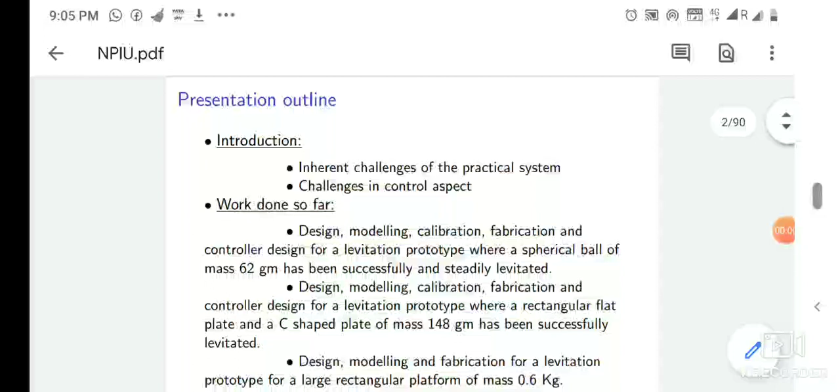Hi everyone, I think all are safe. Stay home. So in this current scenario, I thought I should discuss a topic which is very relevant nowadays.

So I am going to start my presentation on electromagnetic levitation.

Overcoming the effect of gravity has been a dream for generations of thinkers. Now you see that the maglev train has come, the magnetic levitation train. Japan and Germany first started this work. The common point in all these applications is lack of contact, and thus no wear and friction - frictionless. So obviously we need more speed to decrease the time from one platform to another. This increases efficiency, reduces maintenance costs, and increases the useful life of the system.

The recent advances, notably in power electronics and magnetic materials, have focused attention within the last decade on the application of electromagnetic suspension and levitation techniques to advanced ground transportation, magnetic bearings for rotating machineries, etc. So basically, electromagnetic levitation is used in transportation, magnetic bearings, and induction heating also.

Now I am going to discuss how to develop a prototype of electromagnetic levitation.

To develop a prototype, there are two types of challenges: challenges in the practical aspect, such as the robustness of the setup and parameter uncertainties, and challenges in control aspects because the system is highly nonlinear and unstable. So we have to go for advanced control strategies like SMC - sliding mode controller, PID controller, etc.

Now I will discuss three types of prototypes. First, design, modeling, calibration, fabrication of a spherical ball of 62 grams, because the spherical ball is a symmetric object - its center of mass is its equilibrium point. That is the advantage of a spherical object.

But when the shape of the object changes to a rectangular object - because in practical real-time applications the shape is not spherical, it's a different type of shape, as the shape of a train is asymmetric - we have to design control strategies for that kind of complex shape.

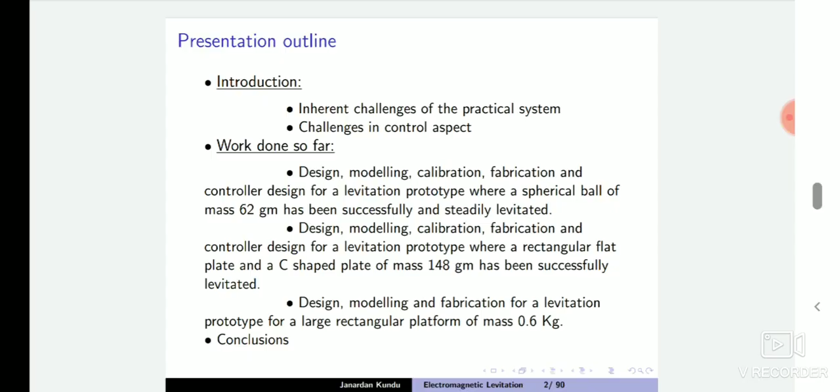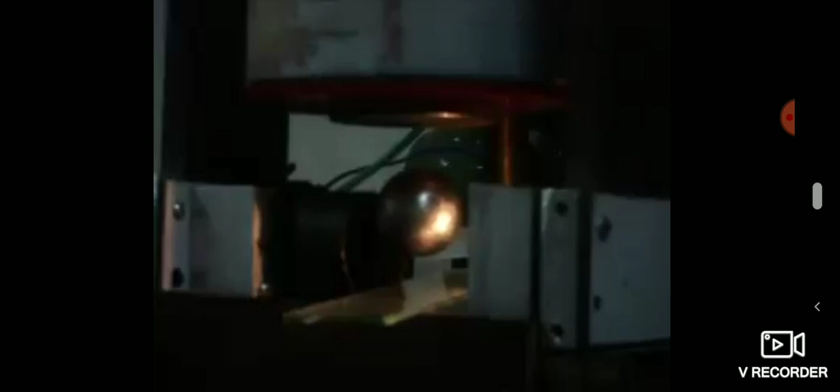Now I am going to show the practical system so you can get the idea. Now see, the spherical object is floating at a 16 millimeter operating gap, and you can see this is the operating gap. Okay, and this is the coil.

Okay, this is the coil. So under the coil, the spherical object is floating, and you can see that.

Horizontally there is one LDR and one bulb. The property of the LDR is, when light intensity increases, the resistance of the LDR decreases. When light intensity decreases, resistance of the LDR increases. This property is the feedback we are applying.

You see that there is only one sensor controlling the Z direction. There are no other sensors in X or Y directions to control the object. Only one direction is sufficient for the spherical object, because center of mass is the equilibrium point.

But when the shape of the object changes, then to keep the steel plate in free space, you need to control the X direction, Y direction, and a small effect will come from roll, pitch and yaw. That also should be taken care of.

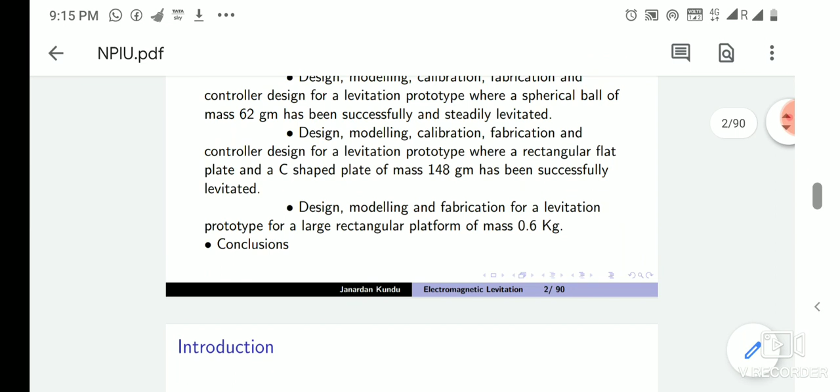Next I will discuss how to design, model, calibrate, fabricate, and design the controller for levitation prototypes.

First point is to design and choose the shape of the object. Suppose the shape is rectangular. Second, choose the weight of the object, suppose it is fixed. Now we'll have to design the coil, because coil is like the mother and object is the child, so there should be a good relationship between the coil and the object, otherwise it will not be levitated. First mass of the object is fixed.

Then coil is fixed. Coil design is a very important part of this levitation, because the coil is actually the actuator. Coil is controlling the current. Coil is balancing the gravitational force. So coil is the mother, coil is doing everything. Coil design is very very important.

And it must be remembered that actuator saturation should not be there. There should be some precautions to avoid actuator saturation.

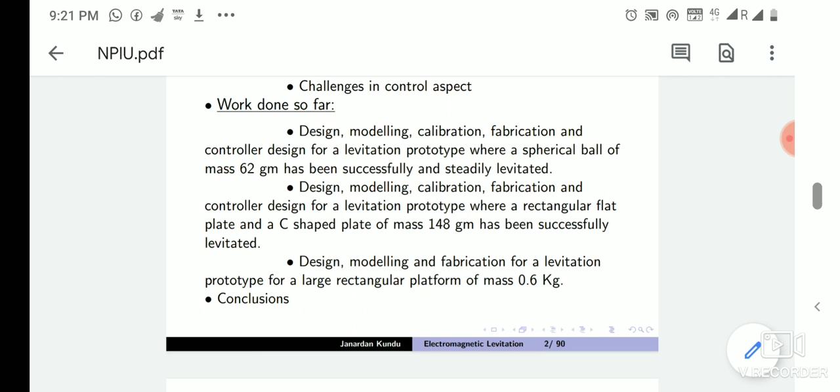So if the object is fixed and the coil is fixed, this is a fixed prototype for this fixed object. No other type of object of different shape or different weight will be usable in this setup. So this object is fixed for this setup.

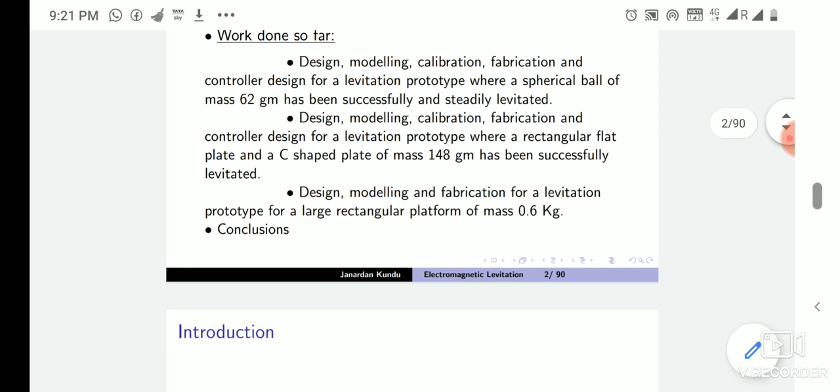One thing I forgot to tell you - we are working on the small signal model, meaning we are not working with the average model. Small signal model means at a particular operating point.

For the spherical object it's a 16 millimeter gap, and for the flat object an 8 millimeter gap. At the 8 millimeter gap we have fixed this, that we will levitate the object at this gap only, 8 millimeters, no other gap. So we will model, design, and do controller design - everything - at that particular gap. That is the small signal model.

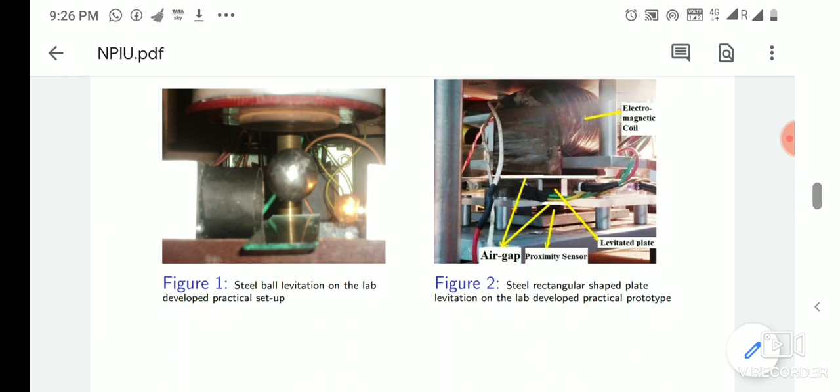Now figure 4, please see that the whole prototype except coil and object is aluminum made. So what is the advantage? The advantage is that it will not be affected by outside flux. That is called true mechanical zero. And spirit level accuracy means that against gravitational force the setup is at spirit level, meaning the object will be at spirit level with the surface of the earth.

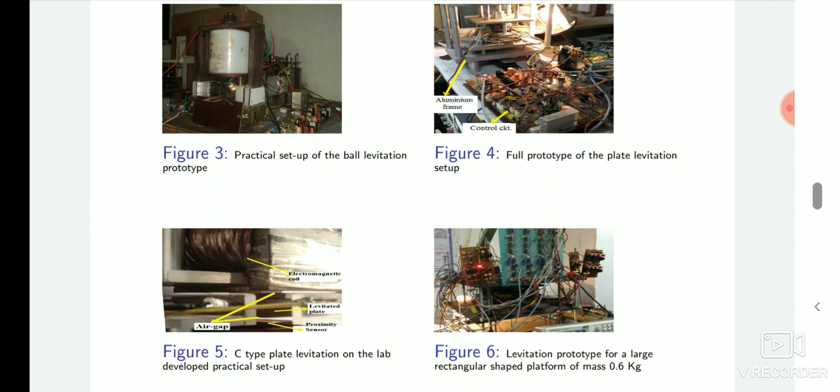And the PCB is very important, because disturbance is the main issue in levitation. Small disturbances, electrical or mechanical, make the system unstable. So if the circuit is not well fabricated, not a PCB, then small disturbances, ripple, will cause the system to be unstable. So the PCB is important for the circuit, such that no disconnectivity or electrical disturbances can make the system unstable. This type of precaution should be taken.

So, electromagnetic levitation: what are the problems in the practical aspect and control aspect? In the practical aspect, the problem is the weight distribution. Weight distribution may not be the same at each point. If it is not the same at each point, there will be inductance variations, and then obviously force variations at each point. So the object will either fall down or touch the coil. So this weight distribution should be taken care of.

I told you that spirit level accuracy is important with respect to the surface of the earth and with respect to the coil. Inductance variations are due to non-uniformity of the air gaps. If air gaps are different at each point, obviously the force will change, so again it will fall down or touch the coil. Disturbances may be of two types: mechanical and electrical. Mechanical disturbances are like what I told you, spirit level accuracy or true mechanical zero.

Mechanical disturbances: suppose we touch the setup, this will make the system unstable. Now electrical disturbances can arise from the power, from the circuits. Electrical disturbance can also arise from the sensors, and from the controller also. These types of disturbances are there.

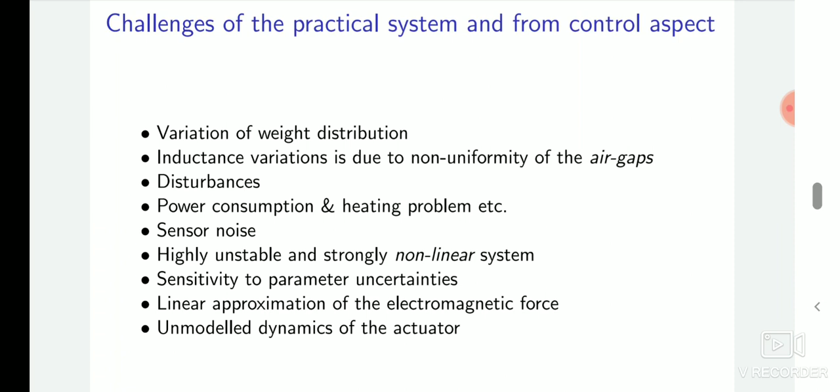Unmodeled dynamics of the actuators: the dynamics of the actuator may not be perfect. That type of problem is there. So systems should be robust. We'll have to minimize the parameter uncertainty. If we can take care of these whole challenges, then we can make the prototype robust, parameter uncertainty will be minimum, and then the system would be stable. Otherwise it is very difficult to make the system stable.

So for the spherical object, we can see the 3D view. First, before we fabricate the setups, there are many processes. First, the design of the coil, selection of the object, mass of the object; then once the spherical object coil design is completed, the frame of the prototype. The frame needs spirit level accuracy and a true mechanical zero.

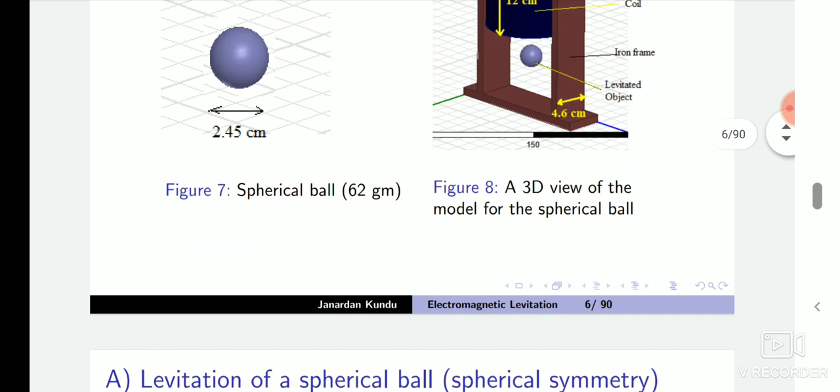Once these are completed, we have to do analysis and simulation; electromagnetic analysis is required first. From electromagnetic analysis we'll have to see the flux patterns, how fluxes are going, flux exiting, leakage flux, etc., and the inductance profile, force air gap profile, current air gap profile, etc. Electromagnetic analysis is very important, because from it we get the idea to fabricate the setup. And then the analytical model is important.

This is the analytical model: how flux is entering and exiting from the core, then passing through the spherical object, then the steel frame; the fluxes go this way. The flux patterns are shown in figure 9, and figure 10 shows the electromagnetic analysis in software, how flux is exiting and entering. The flux pattern is not a linear pattern actually, it is distributing everywhere.

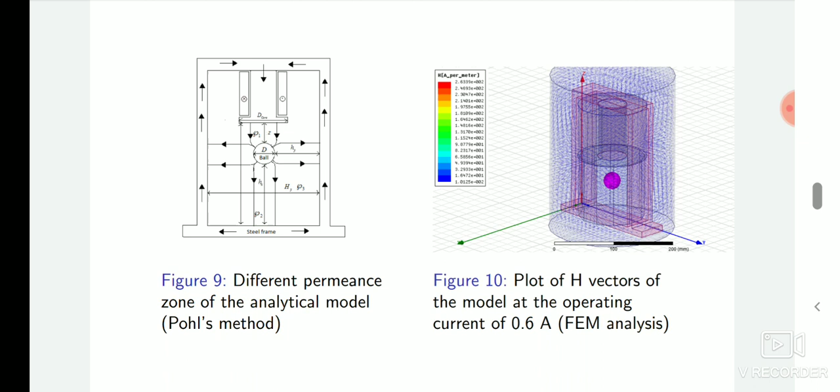So I already told that for the spherical object the leakage is more, because they are not getting a closed path, so flux is distributed here and there. This is something we cannot do anything about, because though we have kept the steel frame, still the flux leakage is very much. The reason is that the coil is too big and the object is small, so it's not getting a flux path, and maximum flux is actually wasted. So it is not generating force, it is not generating inductance.

So the operating current is 0.6 ampere, at 16 millimeter, suppose. At which point the model will be more linear, that will be decided from the analysis or the inductance profile. From the inductance profile we will choose the operating point. What should be the possible operating point to make the system? Each and every point is not an operating point. If we take any point, then it is not possible actually.

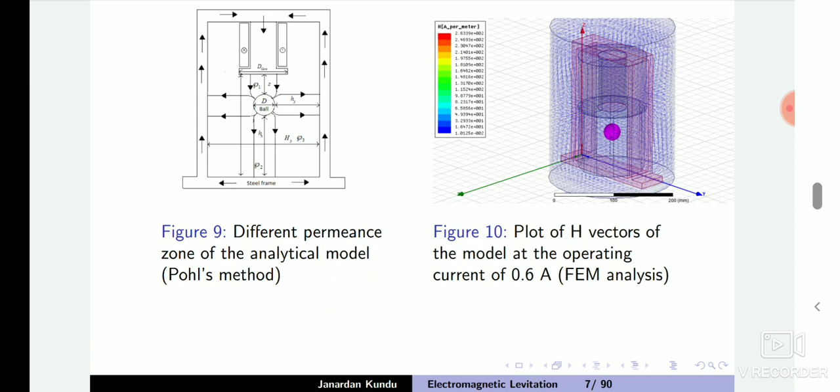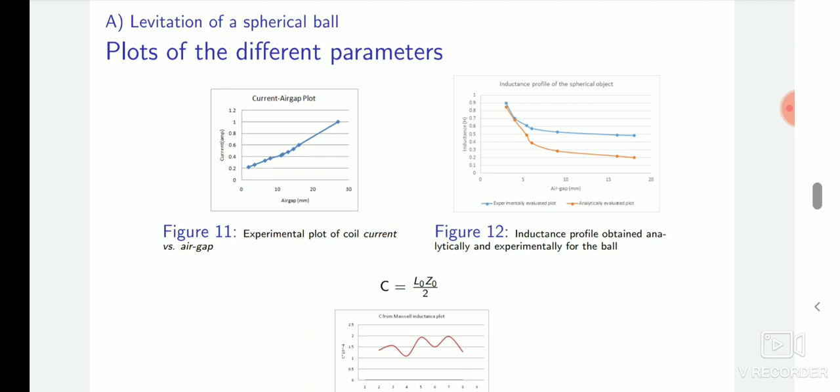So we'll have to choose a particular possible operating point from the electromagnetic analysis or inductance profile, and then at the operating point we will take all the operating parameters. So it's a small signal model. Operating current is 0.6 ampere, so at 0.6 ampere we are doing FEM analysis, and then we will get the parameters. The parameters are the current air gap profile, inductance air gap profile, and the force constant, which are required for modeling.

Now please see figure 12, the inductance profile: at 5 millimeter gap the inductance is more. Obviously when the gap between the core and the object is less, the inductance is more. Imagine that the object is starting from the core and going downward, so this profile will come, and at a particular point, when the gap is something like 20 millimeter from the core, we will get a constant inductance.

That constant inductance is nothing but the coil inductance. Now no flux is entering through the object, so we are getting only the coil inductance. That coil inductance is fixed. So the last one, suppose at 18 millimeter gap in figure 12, we are getting the fixed inductance, that is the coil inductance. At this point there is no effect of the object. If we increase or decrease current, no effect. So that is only coil inductance.

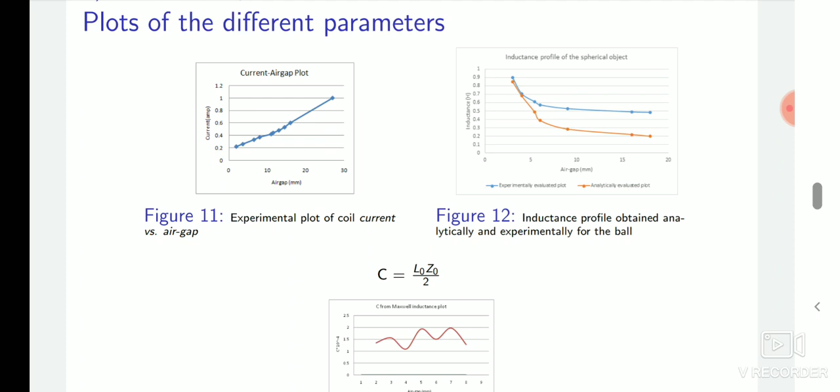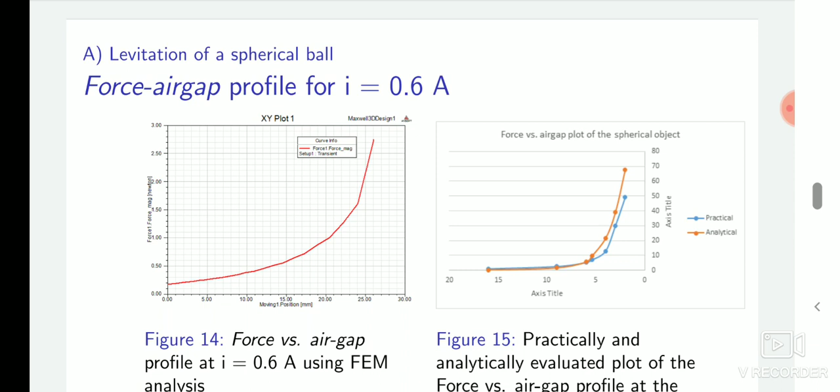Force constant profile and the force air gap profile. So for a fixed current, we are doing this analysis in open loop actually. All the plots are in open loop. In closed loop the current will also be non-linear. After linearizing the model, the current will be fixed DC. So at 0.6 ampere, we are plotting the force air gap profile. Please see, it is a highly nonlinear system.

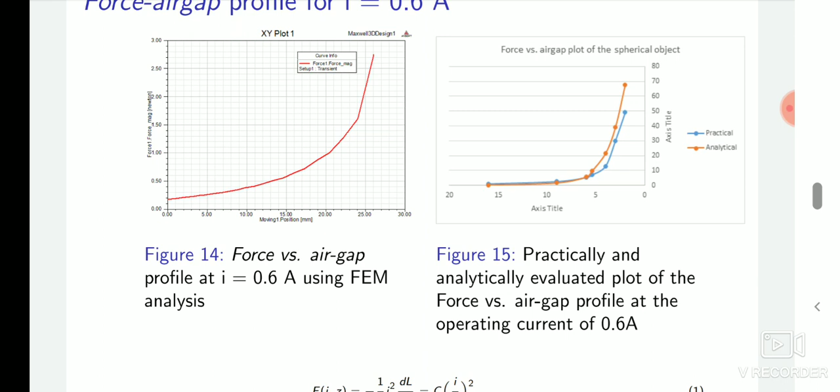So simulation results in figure 14, figure 15, and analytical and practical results. Analytical is fully mathematics. From flux patterns we get the inductances, permeances, then we calculate all the parameters. Force is coming from the inductance actually: F equals minus half I squared dL by dz. So the derivative of the inductance multiplied by the current squared is the force. So we are getting this force.

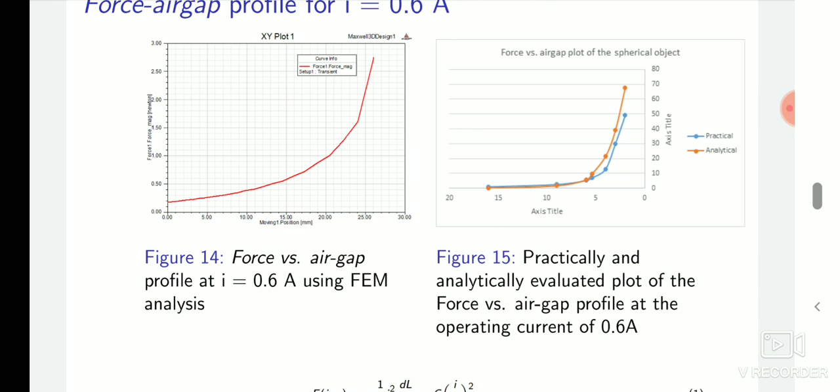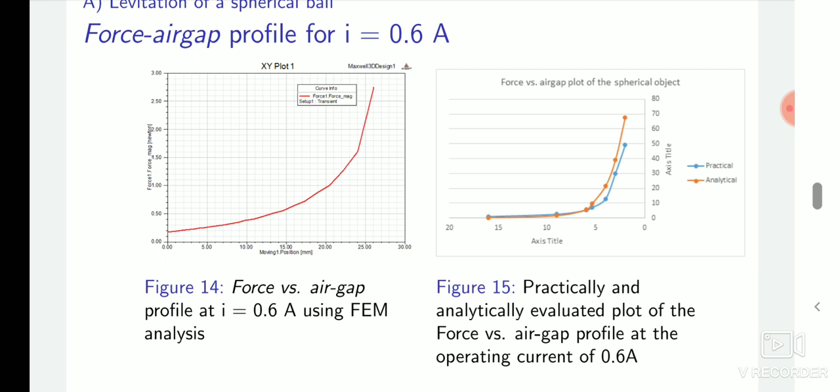Now practical, analytical and simulation. When the analytical, simulation and practical match, then only you can take the plots. Otherwise if there are errors, you'll have to take care of those errors. When it matches, these are the perfect parameters. Otherwise there is parameter uncertainty, and if we take those parameters, the modeling will be incorrect, the system will be unstable, and the controller design will not be correct.

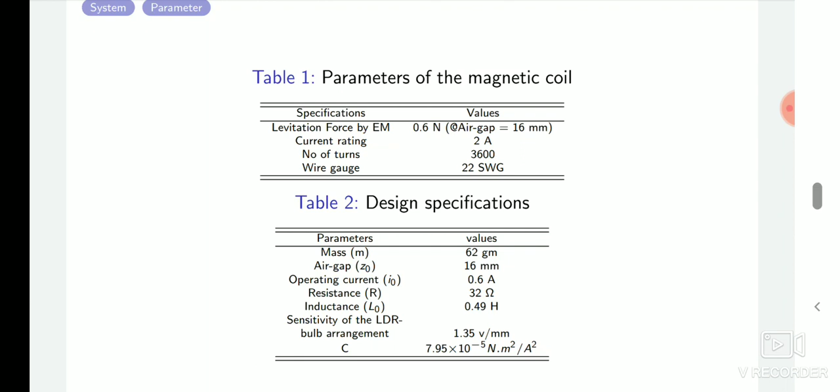Now coil design for the object is also important. Coil design for these spherical objects, which are taken care of 16 millimeter as the operating gap. It is coming from the inductance profile. Okay, all the points are not operating points. So if we see where there is a constant zone, then only we can take the operating point. The other zone will not make the system stable.

Now current rating is important. So how much current is required at the operating point? Suppose 0.9 ampere current is required, then you'll have to design the coil of 2 ampere, taking care of a few precautions: heating problem, power consumption problem, these types of problems. So you'll have to take 2 ampere. Suppose here 0.6 ampere is the operating current, so we have taken 2 ampere current rating.

Number of turns, please see, 3600 turns. Okay, so 22 SWG wire gauge, etc. is used. So coil design is the important part, because coil is the mother and the object is the child. So there should be a beautiful relationship, very beautiful relationship between mother and child, such that it will become stable.

Design specifications of object: we have chosen a 62 gram spherical object. Air gap, we have chosen 16 millimeter gap. It is coming from the inductance profile. It is coming from the electromagnetic analysis that 16 millimeter is the approximate possible operating gap. At that point, it will make the system stable if we design the controller. And operating current, at that operating point, what is the operating current? So all are operating parameters at 16 millimeter gap.

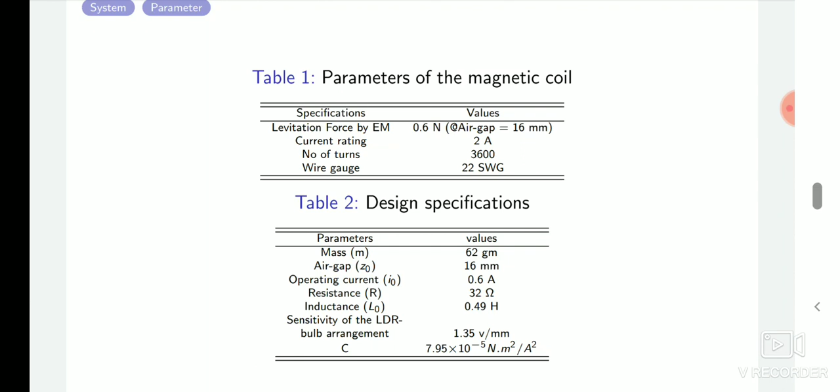So it's a small signal model. So we are not working with the average model like nonlinear control strategies, the sliding mode controller, etc. So resistance of the coil, inductance of the coil, inductance at that operating point actually. Okay. Sensitivity of the LDR when feedback is required. So force constant. So how will we linearize the model? I told that to linearize the model we require the physics behind the circuits.

So one force is in upward direction, one force is in downward direction, and they have one acceleration of the object in free space. So that is the acceleration of the object, m d2 delta z, actually the small signal. It is a small signal model written here, but before that there are lots of calculations from the average model for how the small signal model is coming. Actually using Taylor series expansion we linearize the model from non-linear model to linear model. So then delta z will come, not z, small signal model.

So this is the acceleration at operating point, and two forces are there, the upward coil force and the downward force is the mg. So when it will be levitated, when mg will be equal to the coil force, then it will be stable, and we'll have to avoid the acceleration through the controller. So if we model that, this equation number 2 will come after linearizing, because force is non-linear. So the Taylor series expansion etc. is not in these slides.

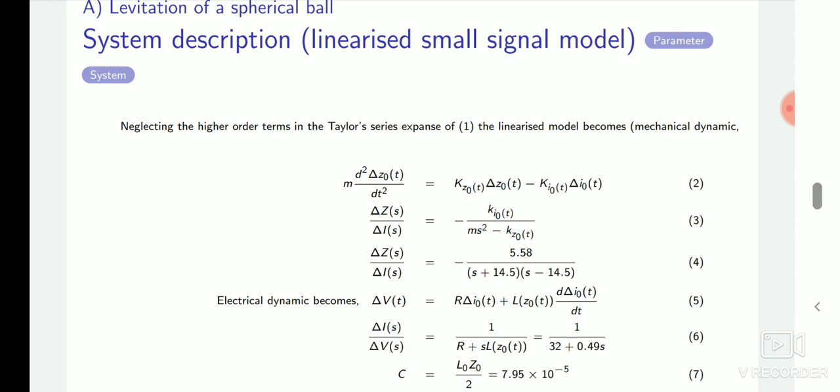And this is the mechanical system, and the current, because the coil is an RL circuit, so there is one electrical dynamics, and that is a first order system, stable system. So the overall system is a third order system, unstable system. One pole is at the right side of the S plane.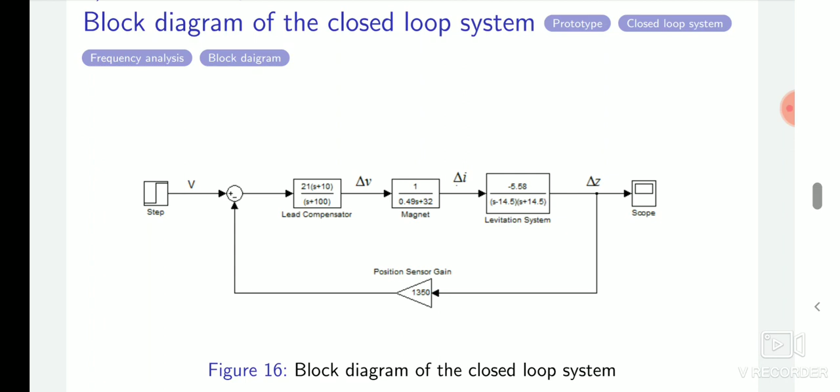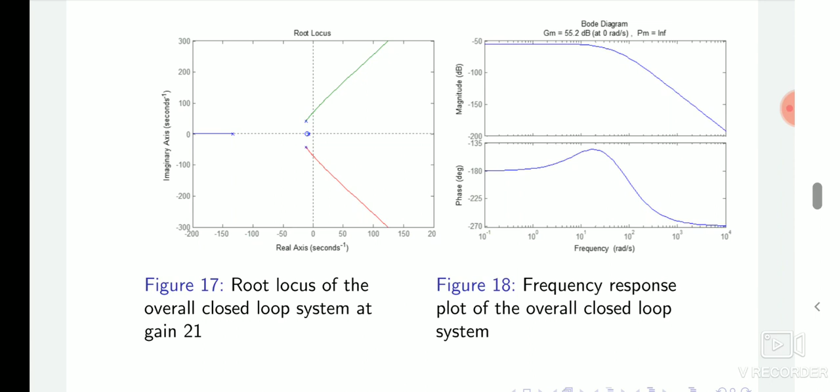So this is the overall closed loop system. You can check the root locus plot at overall gain 21. The system becomes stable. So figure 17 shows the closed loop root locus plot, and DC gain is 21. For the DC gain we will have to put a pot, a variable resistance, to adjust it. Frequency response of the overall closed loop system, so Bode plot. You can see gain margin is 55.2 dB and phase margin is infinity.

Sensitivity of the sensor is important. We have used an LDR and light bulb, so full dark and full light. We'll have to test at each point, keeping the object between the LDR and bulb, and check the sensitivity, and from that sensitivity, at the operating point, we'll have to take the feedback gain from the sensitivity table.

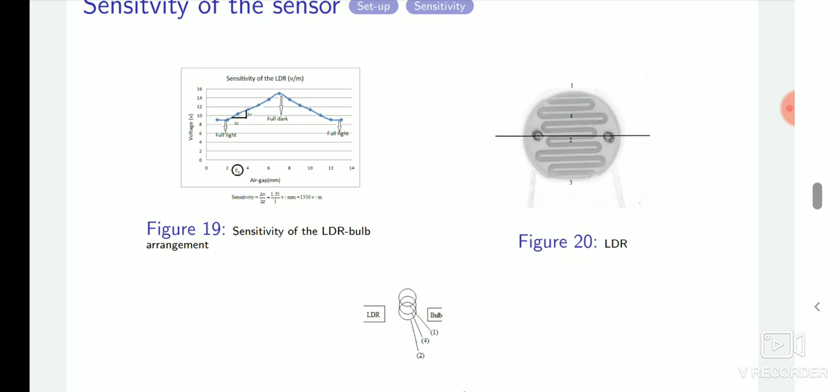You can see that we predicted 16 millimeter as the operating gap, but practically it is levitating at 13 millimeter. Because of that, parameter uncertainty plays an important role. To get exact parameters is a very difficult task. Though we have compared with the simulation, with the analytical model, and with the practical results, and all match closely, there is still some uncertainty coming at the output. That is the challenging job.

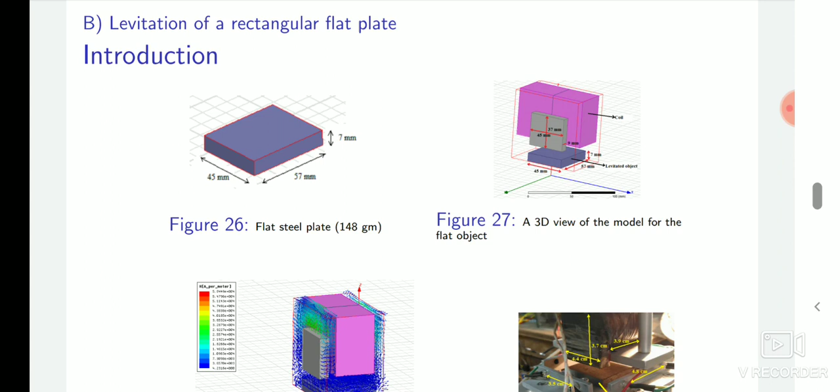So the object is changed, the mass is changed, the coil and core structure will be changed, the number of turns will be changed, and everything will come from the electromagnetic analysis. Before the electromagnetic analysis, we cannot design the coil. When the coil design is completed, meaning the number of turns, current rating, wire gauge, etc., then we'll have to place it in a fabricated prototype with supporting aluminum-made true mechanical zero setups, and spirit level accuracy is required, because we are working against the gravitational force.

We will have to keep the object at spirit level as well, and the gap between the core of the coil and the object should be equally distributed. Otherwise there will be weight distribution problems, inductance variation problems, or air gap variation problems. So that also requires spirit level accuracy. Then we can design, do FEM analysis using ANSYS software, and check the flux patterns, flux leakage, and losses.

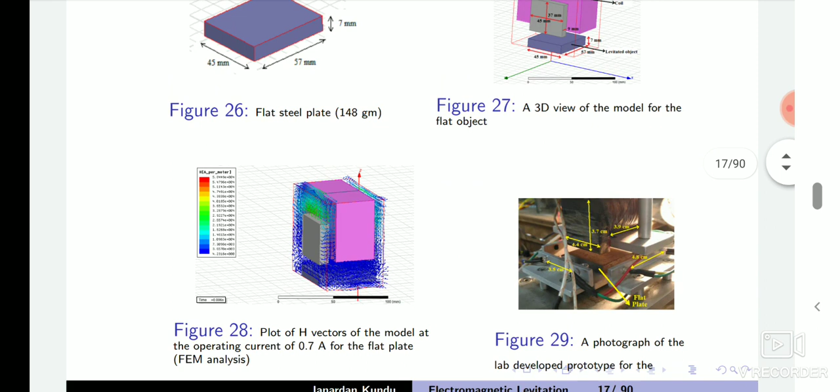There are some eddy current losses, etc., that we also have to take care of. That inductance profile will come from the ANSYS, and from there we can take the required parameters. So one thing we have to mention is that for the spherical object there was only one sensor, LDR and light bulb.

That was controlling only the Z direction. Now we require X direction, Y direction, and Z direction both. In figure number 29, there are lots of LDR phototransistors placed, and below there is one inductive proximity sensor. These three types of LDR phototransistor pairs are placed as two, three, four pairs, along with one inductive proximity sensor.

So all these sensors will be combined using a weighted gain combination approach, and then it will be given to the feedback. The gain combination approach is also a different part of the feedback strategies used in levitation, and this will be used as feedback.

Here, extra complexity arises for this shape because the center of mass is not the equilibrium point. So there will be many other problems: weight distribution, air gap distribution, inductance variations, etc., will be additional challenges for this object. But for the spherical object, there was not this type of problem, since it was spherical.

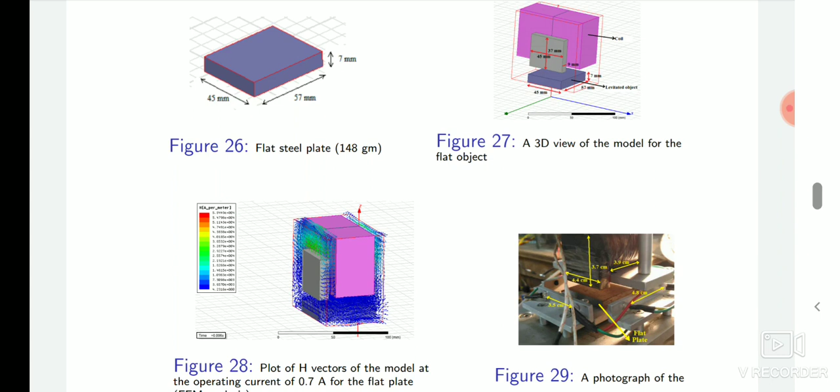If there are some disturbances, there may be some roll or yaw, etc., but it will rotate at the operating point. Here, however, it will become unstable and it will fall down or touch the coil. So this is the type of problem caused by the shape of the object.

Now we require the prototype to have spirit level accuracy, because we are working against gravitational force. Spirit level accuracy means the object will be placed at spirit level and the coil also will be placed at spirit level. Then there will be no chance of weight distribution, air gap variation, or inductance variations, since both the object and coil will be at spirit level.

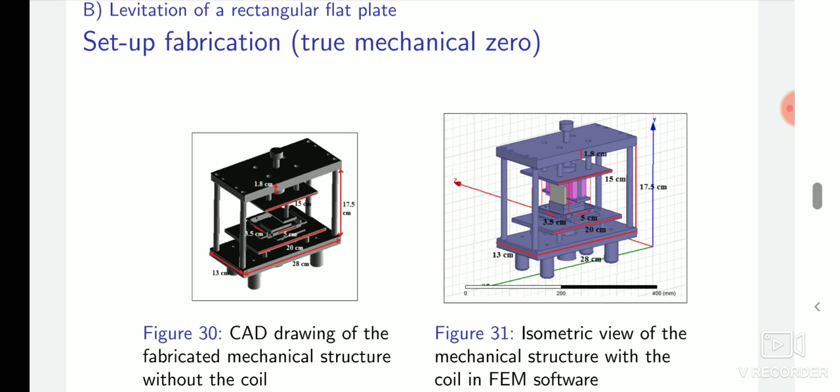So this setup also needs true mechanical zero, meaning that it will not be affected by outside fluxes. Outside flux cannot impact the setup.

These type of setups cannot be made by hand. They can only be fabricated by the central tool room, micro, small, or medium enterprises. It is never possible to build this type of setup by hand. If we try, it is beyond our imagination that the system will be stable; it will never become stable.

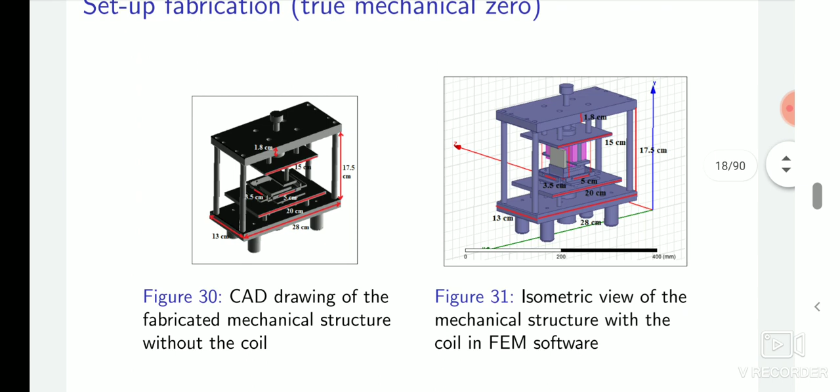From the very starting point of the setup, we are not yet going for the controller design. Now we are designing the platform. So the platform should be spirit level at each point and true mechanical zero. There should not be any kind of mechanical disturbance arising from the setup, and then we can go ahead.

Once this is completed, the object is fixed, the weight of the object is fixed, the coil design is fixed, and the setup is ready. Now we can go for the practical parameterizations. We need parameters for the modeling.

Parameters can be evaluated in three ways: analytically, fully through mathematics, using Pohl's method, considering flux natures, flux patterns, flux leakage, flux linkage, etc. Then simulation, using electromagnetic analysis simulation software like ANSYS. And third, practically, at each point we can take the parameters. These are the three ways we can evaluate the parameters.

Then if it matches, we can go for the modeling. If it doesn't match, if there are some errors, we'll have to rectify that error first, then go for the modeling. Now if the parameterization is okay, then we can go for the modeling and stability analysis.

Modeling means the physics inside the setup. One force is upward, one force is downward, and acceleration is working in free space. This equation will actually come out as non-linear, because force is non-linear. We'll have to linearize the model at a particular operating point, and that point will come from the inductance profile.

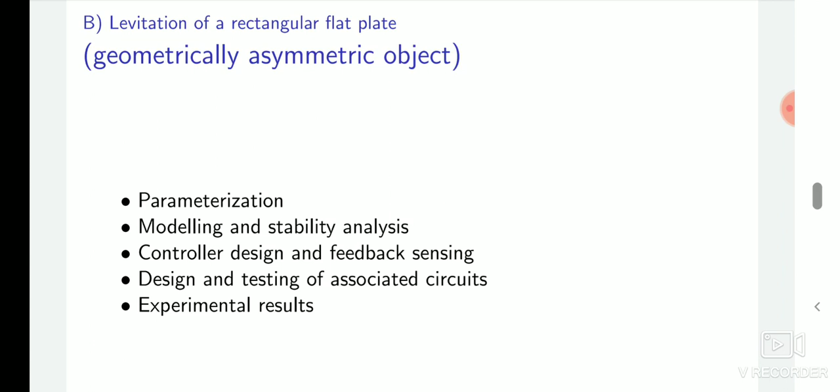Now we'll have to go to the design of the analog controller, then the testing of the associated circuits, and then the experimental results.

So for this plate levitation prototype, these steps are there. First, the analog controller based levitation prototype is made ready, and then FEM based electromagnetic analysis.

From there we get many ideas on how to get the parameters, then parameter evaluation - all the conducting parameter evaluation - and then parameterization, meaning all the plots, and then modeling.

We will choose a particular operating point, the inductance operating point, and at that particular operating point we will choose all the parameters and put them into the equation, and model the system, then go for Laplace domain stability analysis and check the control strategies.

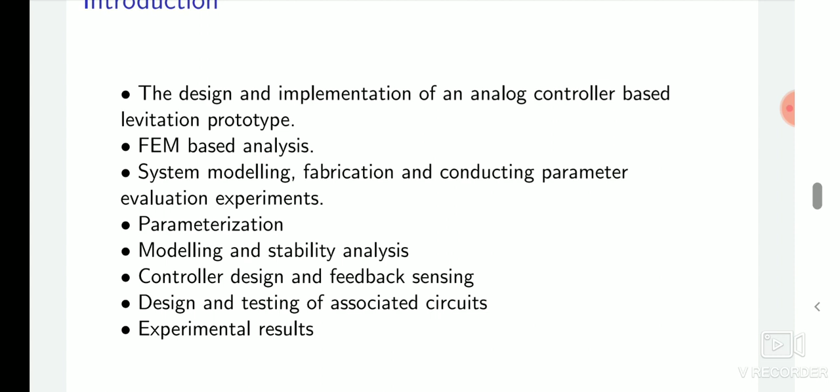When the controller is ready in simulation, we will implement it in hardware in the practical system. We'll have to design the circuits first on Vero board, then breadboard, then soldering, and then PCBs. After this we will perform the experimental waveforms.

So now I am going to discuss analytical modeling. The analytical model is based on the flux patterns - please see there are six zones of fluxes for the flat plate, and in the shifted case, shifted by x amount, the flux patterns show fewer straight lines and more bending. This is called the Pohl's method.

We will have to take care of all the bent fluxes through a huge integration - we'll have to integrate all the cross sectional area of the flux surface, or integrate all of the vertical surface.

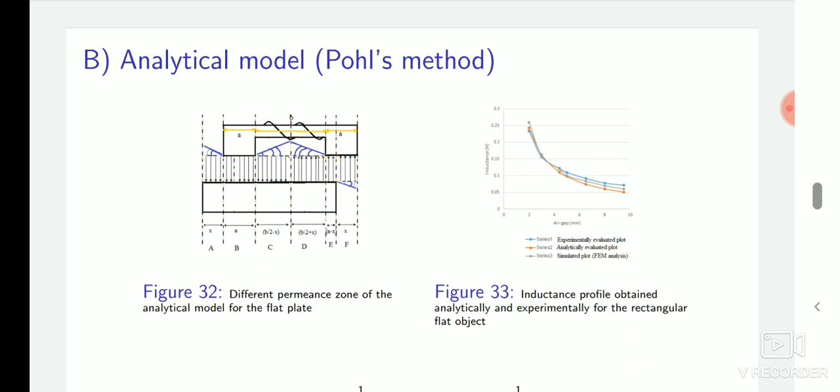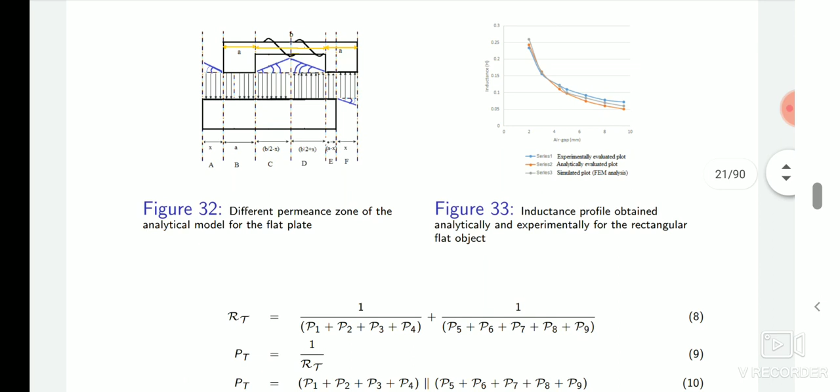So the cross sectional area we will have to calculate through integration, and then we will get the inductance profile obtained analytically, experimentally, and through simulation. We can get the permeances here.

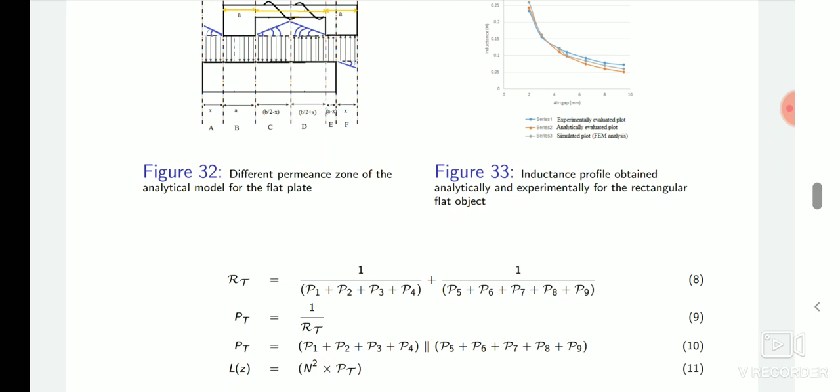Please see P1, P2, P3, P4 - permeance 1, permeance 2, permeance 3, permeance 4. These are parallel, with the permeance entering the other arm of the core, so we get the inductances. We know that when permeances are parallel, we get the reluctance in this way. So we get the inductances, and with the inductance we can check the inductance plot for the displacement in the x direction.